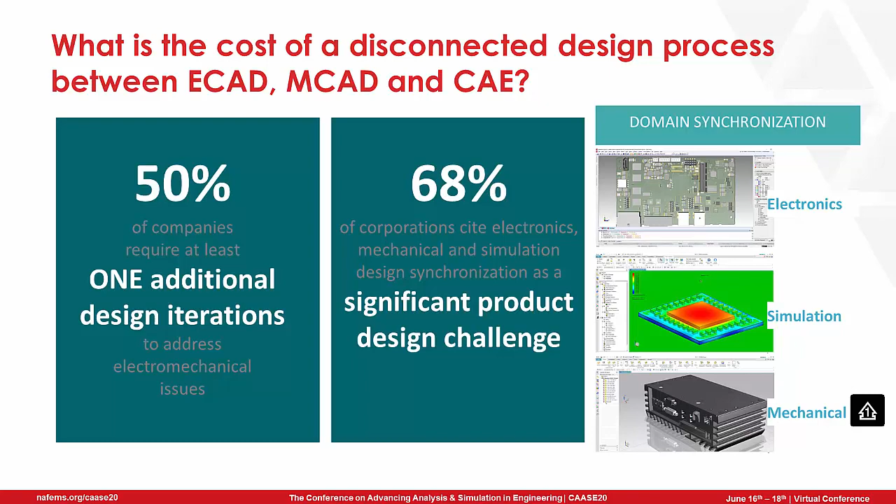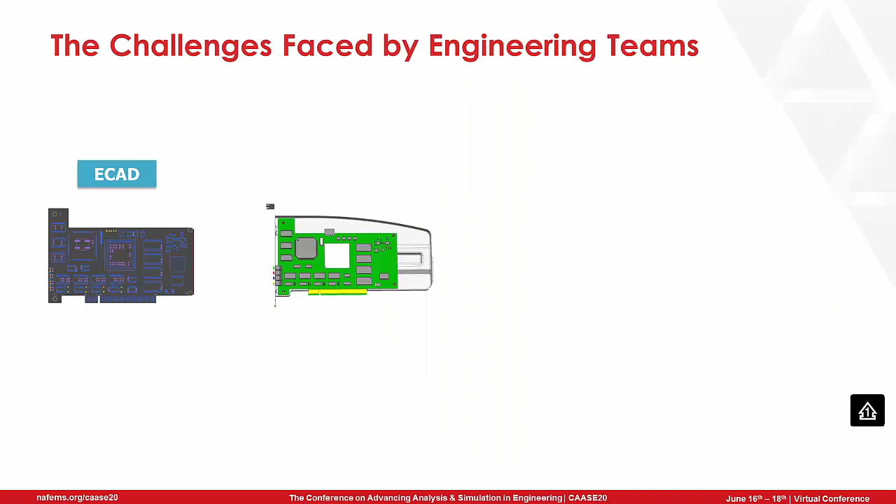So first, let's have a look at the challenges faced by the engineering teams. So on the left, you have the ECAD domain, where the schematic is designed and PCB layout is done. In the middle, you have the mechanical domain, which takes care of all the 3D information for the components, the board, the enclosure, making sure that all clearances are fine. And on the right, you have the simulation aspect. So here we listed a few possible options: electronics cooling, PCB thermal, vibration and acoustic.

What's interesting is that sometimes when you start, for example, with electronics cooling, then you may need to go into more detail. So going from a system level analysis to a board level analysis to then a component thermal analysis. Also, if we look, for example, at the solder creep pin's durability, you may require inputs from other simulation results. So for example, the electronic system cooling and the durability will be required. And once the multiphysics aspect is completed, you need to be able to send back this information to the mechanical designer, even to the electrical designer, if changes are required in order to optimize your design.

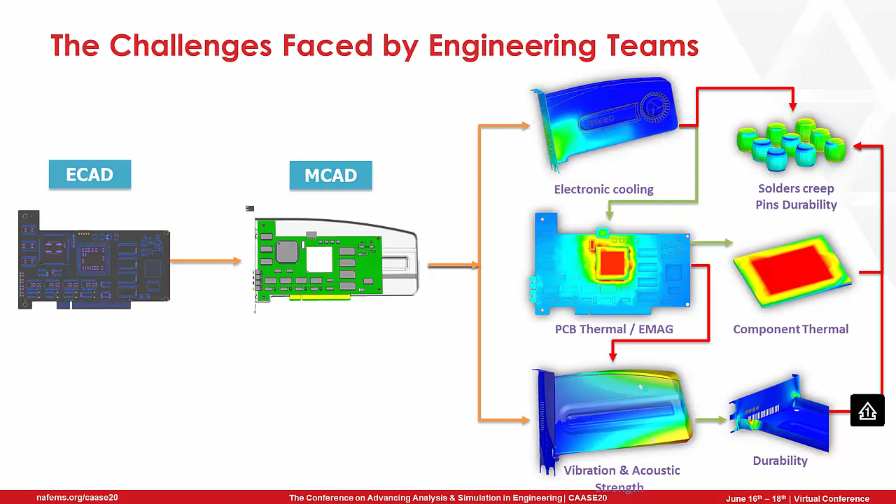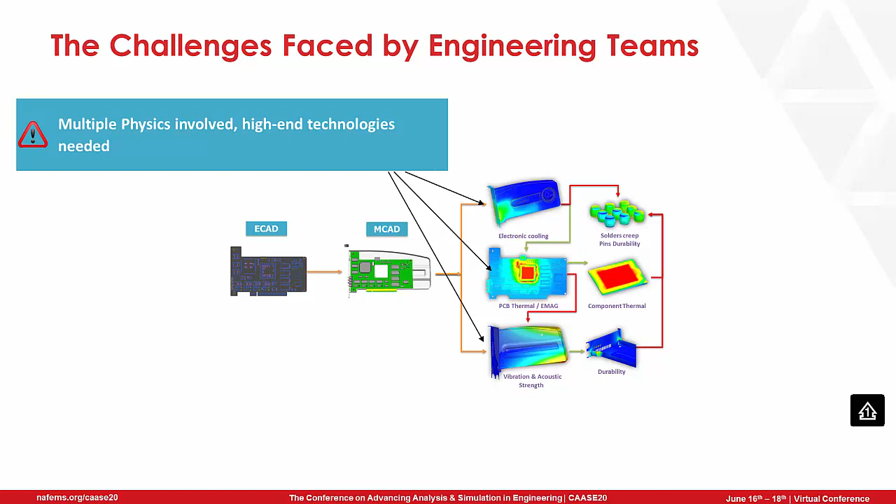So when looking at all these multiple arrows and this workflow, you realize that there are a few pain points. So first of all, multiple physics are involved, right? So you really require high-end technologies. Also, there's file transfer involved here between ECAD and MCAD, between MCAD and CAE, and also between the simulations. So very often those processes are taking too long and the data files to exchange or transfer are too large.

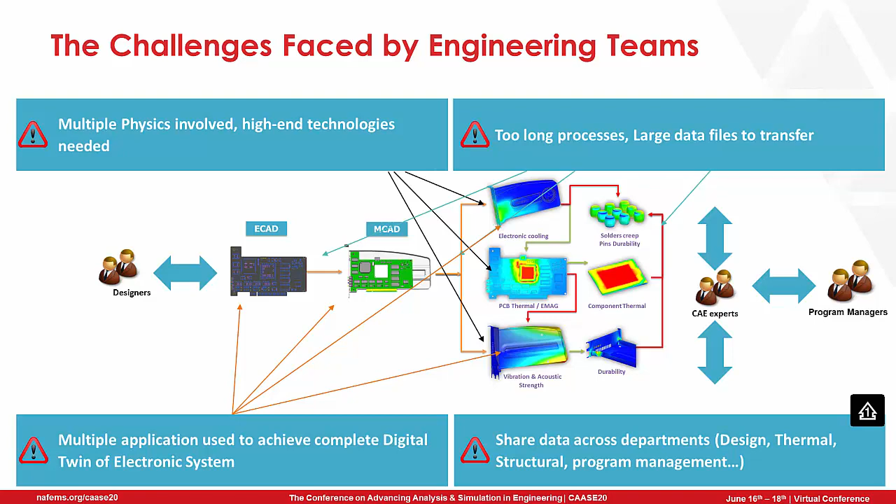As I mentioned previously, you might need multiple outputs to be used, so multiple applications may need to be used in order to achieve this digital twin and be able to optimize your electronics design. And the fourth one, well, multiple applications mean that multiple stakeholders may be involved in this process. So you may need these different expertise just to be able to use the tools, and also you might need to share this data across the different departments in an efficient manner. So let's start with the ECAD-MCAD integration section.

So to understand a little bit better which file format we should be using, I think it's important to have a quick review of what is a printed circuit board. So a PCB is a structure used to connect and support electronic components.

It's made of multiple laminates, which include mostly glass epoxy-based material, and then you have copper that's coated on both sides. So the in-plane connections for the components are done by etching away the copper to leave the different traces. And then after you can protect them with either plating if they're pads or with solder mask for the traces.

The through-plane connectivity is done by drilling holes either mechanically or by laser, and then by adding copper within the barrel. So you have the traces, external, internal, the copper planes. You have the stack-up details that you need to fully understand with the file format. So dielectric thickness, the signal layer thickness, the adhesives, and obviously the vias for the interconnections.

So are you just using through-hole vias? Are you using blind buried vias? So vias that don't go directly through the board? Micro vias, which would be smaller in this case. So all these aspects are very important.

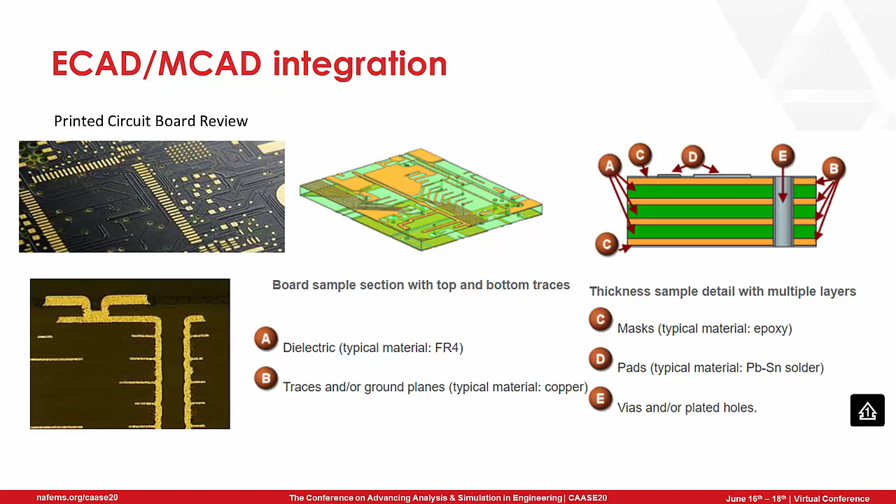So if we look at the different formats available out there, there's at least two of them that are very good. So the first one is ODB++. So if you're doing thermal analysis today, you might already be familiar with that format. So it's a format that allows you to capture all the details of the PCB from the component to the board, the stack-up details, the vias.

So this format contains everything since it's a manufacturing format. So it's used by the ECAD designer to send to the PCB manufacturer to fabricate the PCB. Now, the IDX format, which is a collaboration format, also contains the same information. But what's interesting is that you also have a workflow feature that is completely unique with regards to the other file formats.

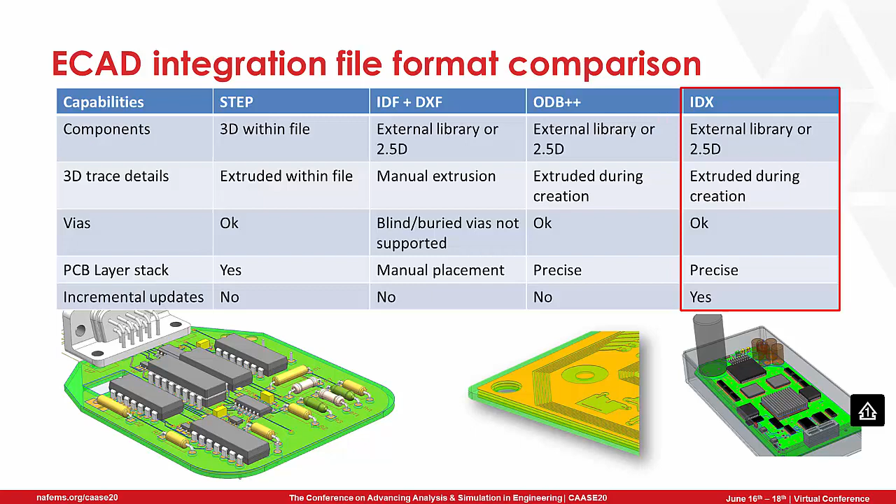So what is the IDX collaboration format? It's a workflow for incremental design exchange. So when you start the design collaboration, you initially send the full design, which we call the baseline. If it's coming from the mechanical side, you can put your initial board dimension, initial connector, LED placement, some mounting holes. But then after, the design will advance concurrently.

So any following changes will come from an incremental IDX file, for which the receiving end can either accept or reject the changes. So it's really like a discussion going on here where you understand the changes that are coming, so you have a robust transmission, you have a visualization of the results of the changes that are being done, and everyone can synchronize on the changes at the end.

Now, one thing that can become difficult sometimes is managing all those changes. So there's a lot of back and forth, accepting, rejecting changes. Sometimes the discussion and collaboration can take longer. And sometimes a rejection can be caused by something very simple that is just unknown to the initial designer or to one of the domains.

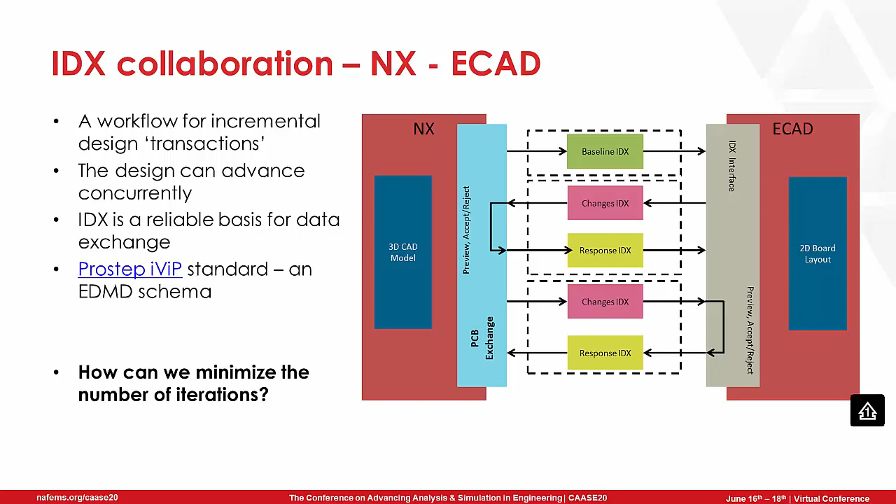So one of the questions when it comes to IDX collaboration like this is how can we minimize the number of iterations? And in the optimized workflow that we're presenting, there's one new feature that we developed in our tool, which is ECAD design rule checks inside the mechanical tool.

DRC rules is a concept that's already used on the electronic side, so you can check clearances between traces, holes, components. But on the mechanical side, most of the time what you have in your tool is a generic 3D clearance tool. And what we did on our side to optimize the workflow is to enable the 2D rules to come from the ECAD side. So we pre-process the data to allow orthogonal checks in the X and Y plane and not just the 3D clearance checks.

And what's very important when you use design rule checks in a mechanical tool is to support multiple PCB concepts to define those rules more easily. The body for the board substrate, the areas, the component board side, the ref des, package, part number, all those concepts need to be understood. And obviously the performance is very important. For example, for 3D clearance checks, 2000 components, double-sided board took around 10 seconds.

So if you take too long for doing those checks, then it might become easier to simply send an incremental change to the other domain and get their feedback. But if you can get quick response from DRC checks when you're doing what-if analysis, moving things around, it's very valuable. And then obviously you need to be able to differentiate between the PCB entities and the assembly components to conduct more advanced types of checking when it comes to the PCB, to the mechanical enclosures, for example.

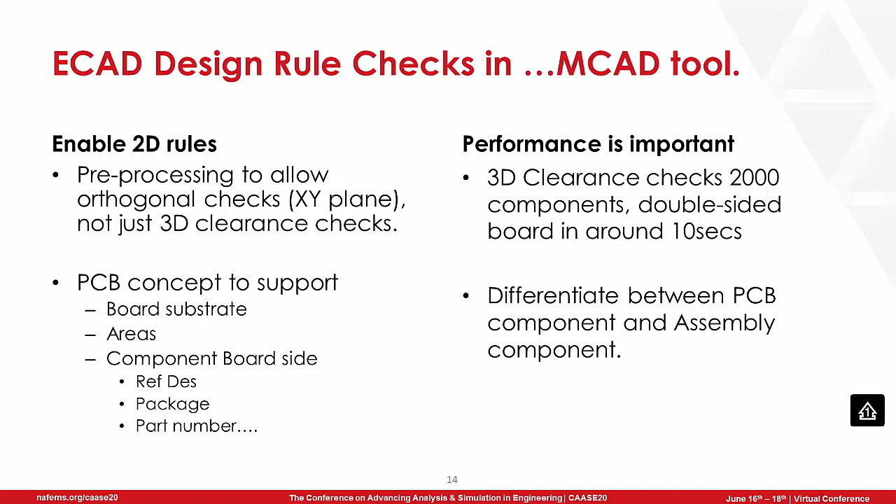So by combining the IDX collaboration workflow with the design rule check engine, we really get an optimized ECAD-MCAD collaboration process. At the top here, you can see that you can preview the changes, send the transactions between the two domains, and you get a synchronization of data, which is often difficult to guarantee with other formats. And again, you minimize the number of iterations.

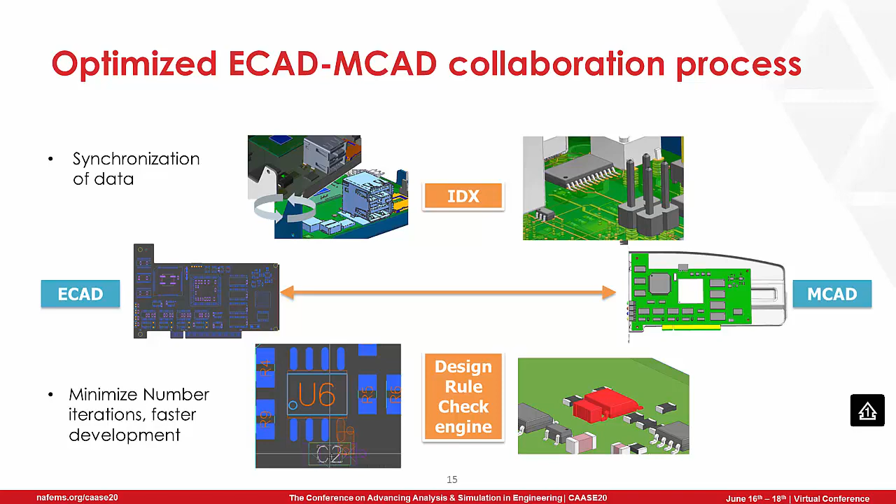You make those transactions more efficient with the design rule check engine because each domain can do initial validation to see if what they're proposing makes sense or not, if they violate any rules that would be from the other domain. So by combining the IDX and the DRC capability, you really make sure that the transactions you're doing are more meaningful. Now let's continue with the thermal simulation of PCBs.

We've mentioned it a little bit earlier in the presentation. The miniaturization aspect of electronics is very important in the different industries. And then you combine that with the increase of performance that is required, and it becomes more and more important to cool the electronics correctly because the heat can have effects on the circuit operation as well as on the PCB integrity. So for example, on the thermal effects for the circuit operation, the gain, threshold voltage, leakage, and other electrical parameters can vary with temperature. For example, a 10 degrees Celsius temperature increase can double the current leakage in active devices.

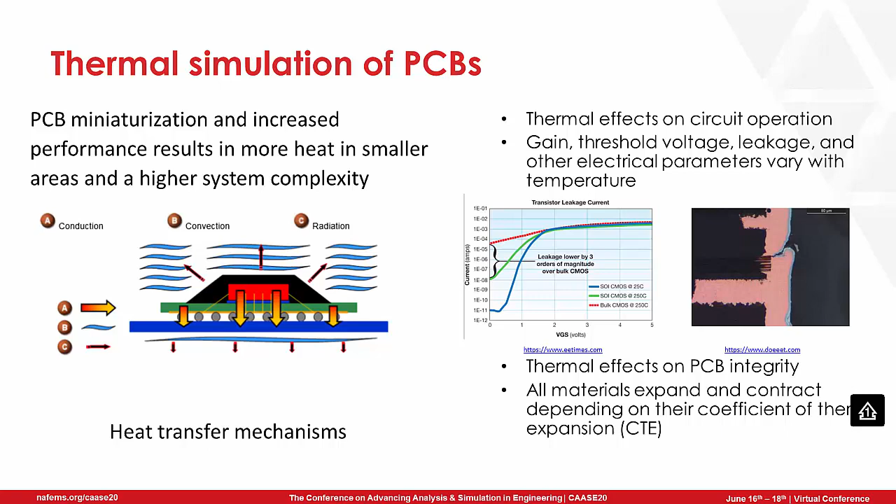And obviously the PCB integrity is also very important. All materials expand and contract depending on their coefficient of thermal expansion, in other words the CTE. So the temperature increase may lead to component failure, or as we can see in this picture, a via cracking within the PCB, which can be very difficult actually to catch when you're testing your board. A good CAD-CAE integration here is required for proper electronics cooling.

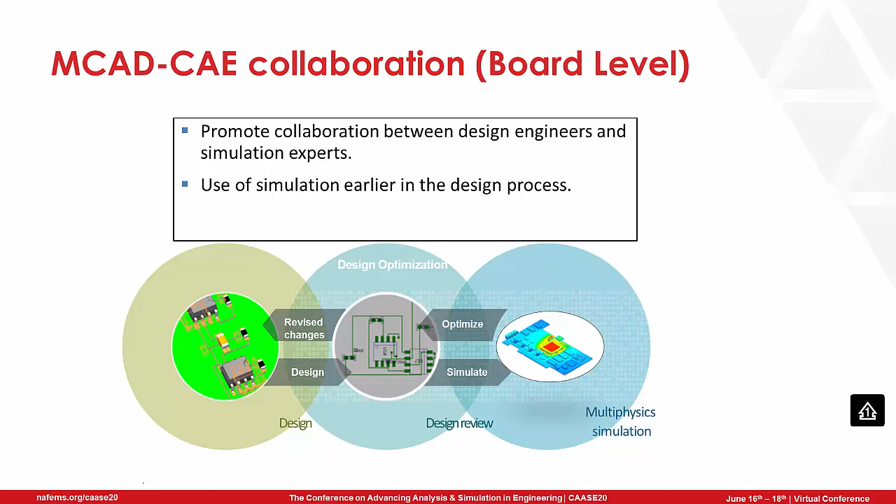So we're going to look at two aspects of the MCAD-CAE collaboration. First, how can we promote the collaboration between the designers and the simulation experts? And then, how can we use the simulation capability earlier in the design process, so not just at the end when the PCB is fully completed? So the first thing that comes to mind is, can we do the simulation in the same environment as we do the mechanical design? And the answer is yes.

So certain tools like Simcenter 3D allow for a single unified environment where you can do the mechanical design, the meshing, create the boundary conditions, and do the post-processing. And since you're in a single environment, first of all, there's no file transfer. And it really facilitates the design exploration and the optimization that you can do because there's no file transfer.

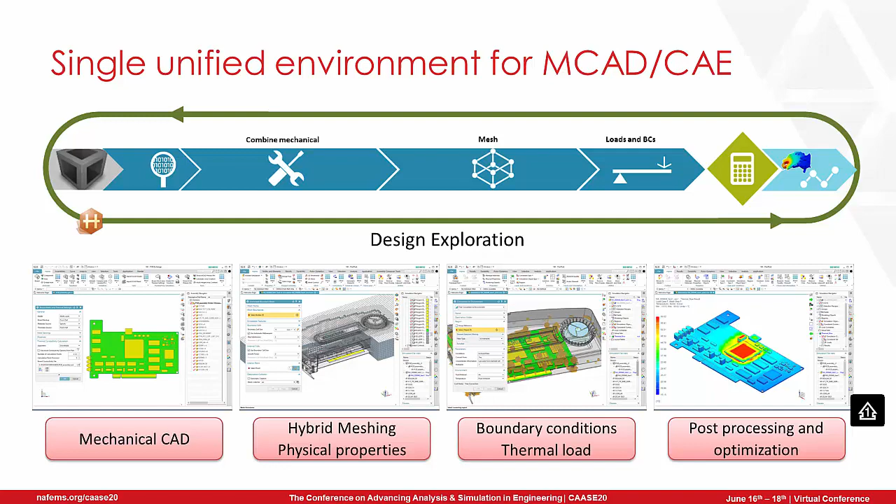Now, how can we optimize and make this loop as efficient as possible? Well, first of all, similar to ECAD-MCAD integration, there's the performance and the efficiency of this process. So that's why in our solution we use a 2D multi-layer shell approach. If you start meshing your PCB with 3D elements, with all the details of the copper traces, this can be a very manual and time-consuming process. So the 2D multi-layer shell approach allows you to automate the simulation preparation from CAD.

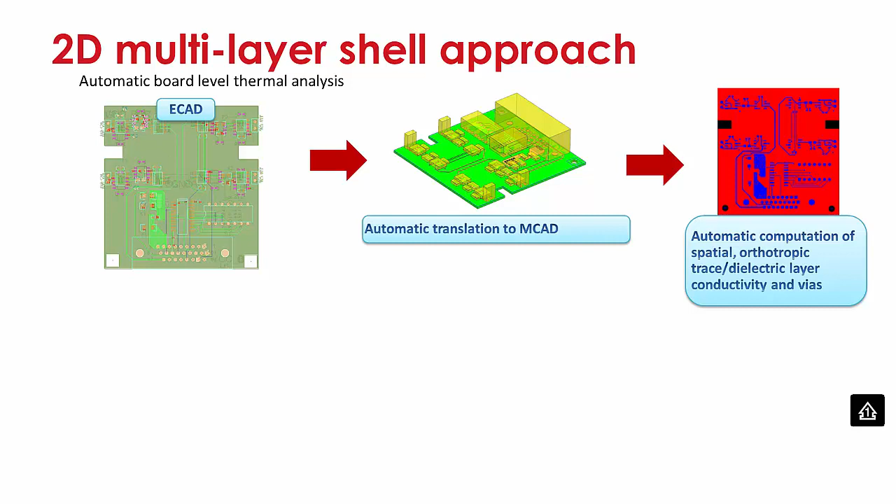For the components, we can automatically generate lumped representations of all the components with different JEDEC models, one resistor, two resistors, based on the level of detail you're looking for. And then you automatically create this thermal flow model by meshing the boards, meshing the components, creating the simulation objects and all the boundary conditions that are required for your simulation.

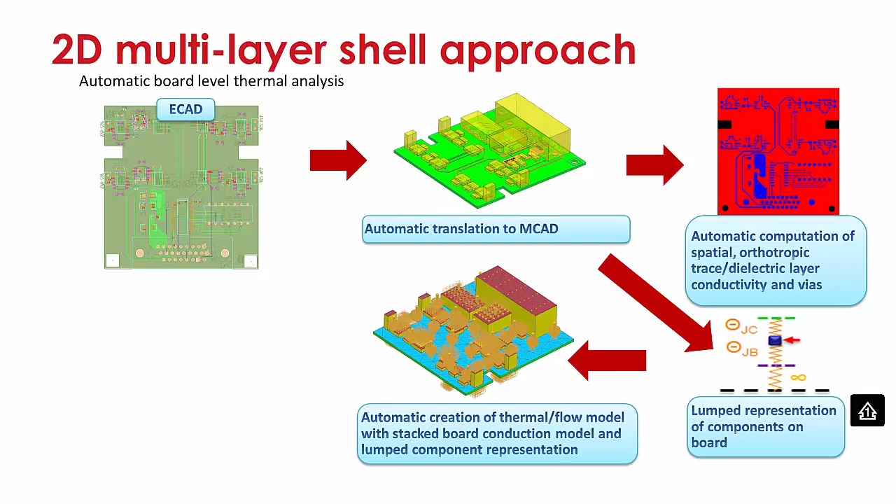In my presentation last year at the NAFEMS World Congress, we compared this approach with the 3D detailed approach, and the conclusion was that we could get the same level of precision within 1 degree Celsius if your parameters are set correctly. The advantages of this approach, of the multi-layer shell approach, are multiple, but I would really like to bring your attention to two.

First of all, the performance. By this approach, it can take minutes instead of hours when compared to the detailed 3D meshing approach, based on the level of complexity to generate this model. So you're not wasting time doing manual work, and since you have a performant process, now you can promote the simulation during the design process. So since it only takes you a few minutes to generate your simulation models, you can run it more often earlier in the design process.

So for example, at the component placement, with maybe just an average of the copper distribution per layer, at the pre-routing when you're starting to get some copper content, and then at the end for the full routing, and more often based on the different design iterations. So the performance and simplicity of this approach combined with the precision allows you to really promote the simulation process earlier and benefit the designers with your results.

The big second advantage is the CAD associativity. As I mentioned before, we're in a single unified environment in this case. So what that means is that the FEM and the CAD and the simulation objects are associated together. So if we move one of the components in the mechanical domain, the FEM and your objects on the simulation side will also move.

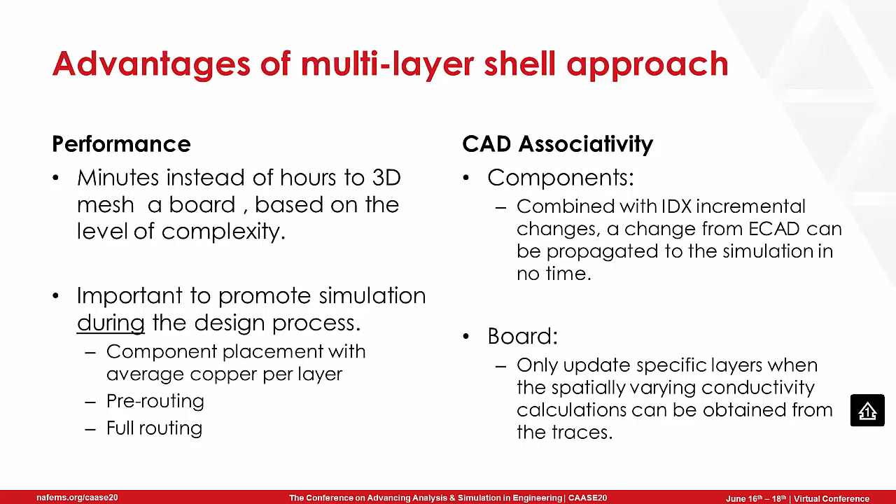Looking back at our optimized ECAD-MCAD process, to which we added the CAE aspect for thermal analysis, here's how the optimization looks at this point. We still have ECAD on the left, MCAD in the middle, but now it's actually CAE as well with our unified environment. So the file transfer is still IDX. We still have the design rule checks to optimize the electronic to mechanical collaboration. But then we have between MCAD and CAE no file transfer, so full synchronization of data from MCAD.

And then what's very interesting is that as you get your simulation results and you'd like to optimize the temperature distribution, you can reuse the design rule check engine to validate your different what-if scenarios. So if I move this IC to a certain place, if I move this component there, if I change the board or the mounting hole locations, I can make sure that I don't violate any rules that would be on the ECAD side. So still really optimizing the ECAD, MCAD, CAE collaboration in this case.

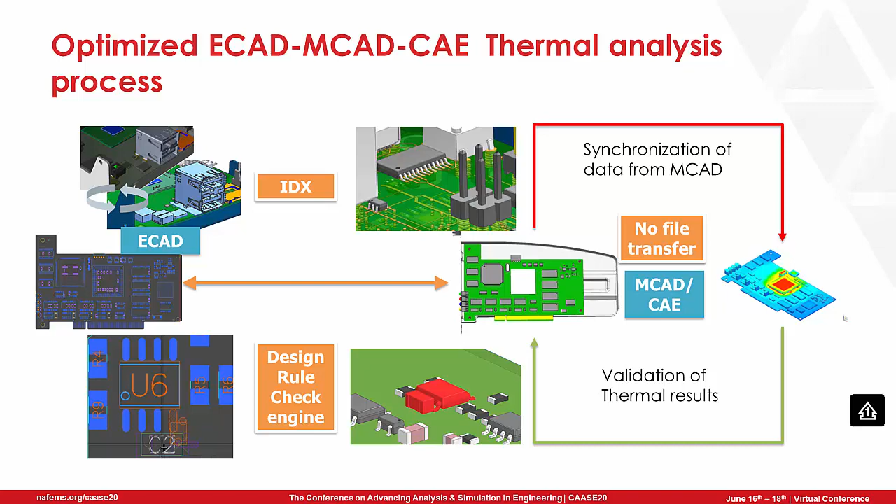So now let's go to our last topic, the structural analysis. And in this case, since we're discussing miniaturization of electronics, we'll discuss high density packaging, which is required to address those small form factors. So the ball grid array packages enable closer placement of pins for ICs with hundreds of pins, right? But the difficulty with those packages is that they require an advanced surface mount process.

So first of all, the reflow profile needs to be optimized. And establishing a reflow profile is not easy. You need to make sure that the minimum reflow temperature is reached to reflow the larger components, and at the same time, the temperature does not exceed the threshold temperature that might damage the smaller heat-sensitive components. So the optimal profile must take into account the solder paste, the flux used, the size of the board, the density of the components on the board, and the mix between large and smaller, lighter components, right? So this is very difficult and time-consuming to find.

So you're gonna have to use thermocouples at multiple locations on the board and do multiple trials to get your profile right. And that's just for the reflow. If everything goes well, you're good, but the inspection is difficult. You're gonna need an X-ray machine or something like this. It cannot be manual inspection with this high number of connections. Ideally, you have in-circuit testing that's very precise and developed that can help you with this. And as we can see from the picture here, the rework is almost impossible. Most likely, you're going to have to throw out the component and add a new one.

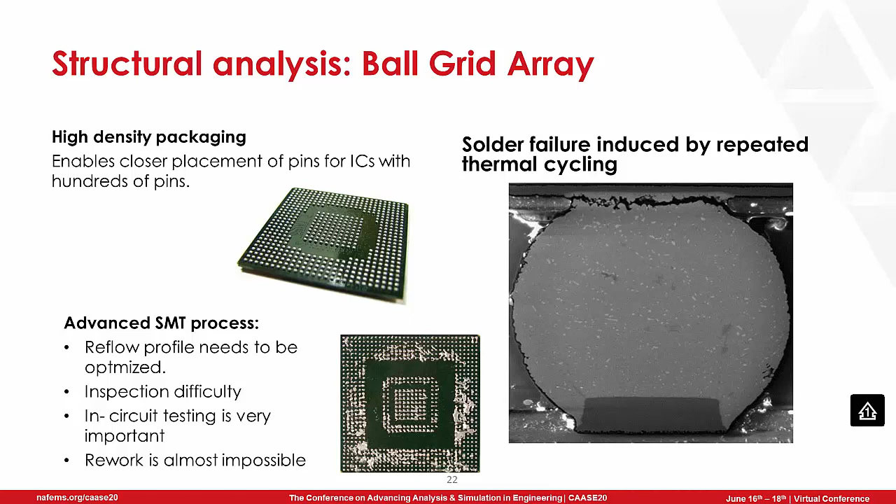So it's very important whether you are at the assembly stage with the different processes for the fabrication and assembly of your board, or whether you're in the field, solder failure can be induced by repeated thermal cycling for these components.

So when it comes to PCB design, there can be multiple sources of component models. You have the symbols for the schematic, you have the 2D footprints that are used on the electronic side, you have the 3D models, you have the thermal component models, so it could be compact thermal models, it could be the JEDEC resistor models. You also have structural component models that you need to use.

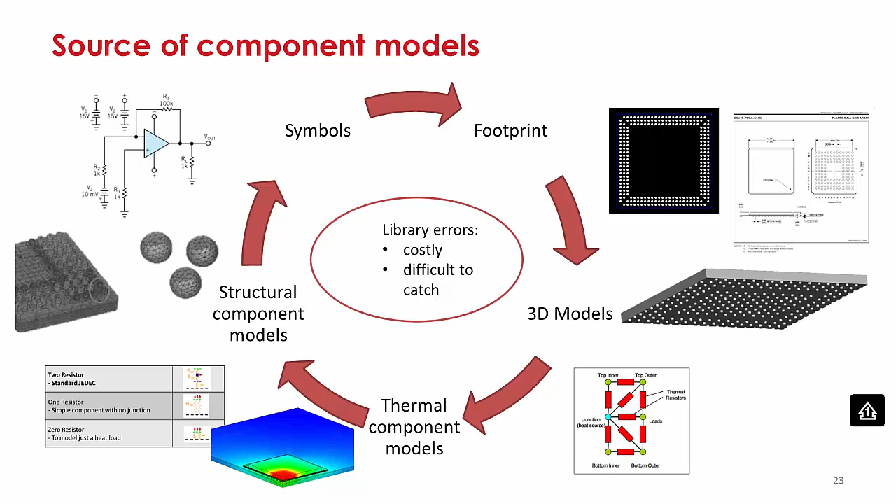And before going there, it's important to have an accurate representation of the 3D models. And when it comes to ECAD and MCAD collaboration, sometimes ECAD can have different 3D models than MCAD. So 3D model exchange between ECAD and MCAD. Why is this important? So first of all, you need consistent and accurate ECAD and MCAD libraries for your design. You need to have the same geometries, you need to have the same orientation of the 3D model with regards to the footprint. And this needs to be synchronized for all your library.

Now, generally, approximately 10% of the total PCB design effort is spent on library, and library errors are costly and difficult to catch. In this case, we decided to develop a tool that can exchange 3D models between your electronic library and your mechanical library. So this way, when you come to the simulation side and you need to have an accurate representation of your 3D model, you can be sure that the 3D model is actually the same one that's used between all the different domains.

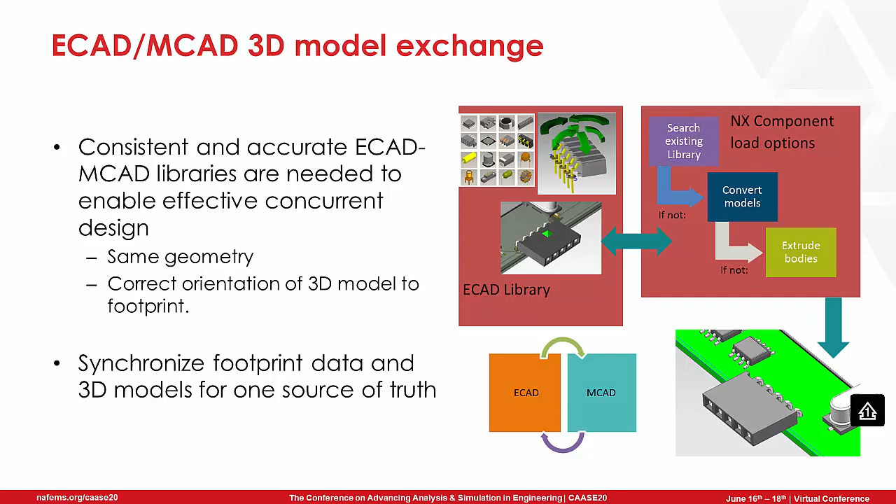Just like on the thermal simulation side, another very important aspect to optimize your workflow is the associativity of the FEM to the CAD part. When you create your different mesh for the die, for the package, the mold, the substrate, the ball grid array, you can associate the FEM to the part file, and when the configuration of your CAD changes, so again, going from an IDX file, coming from another change from the mechanical designer, you can update your FEM and your simulation environment to reflect those changes.

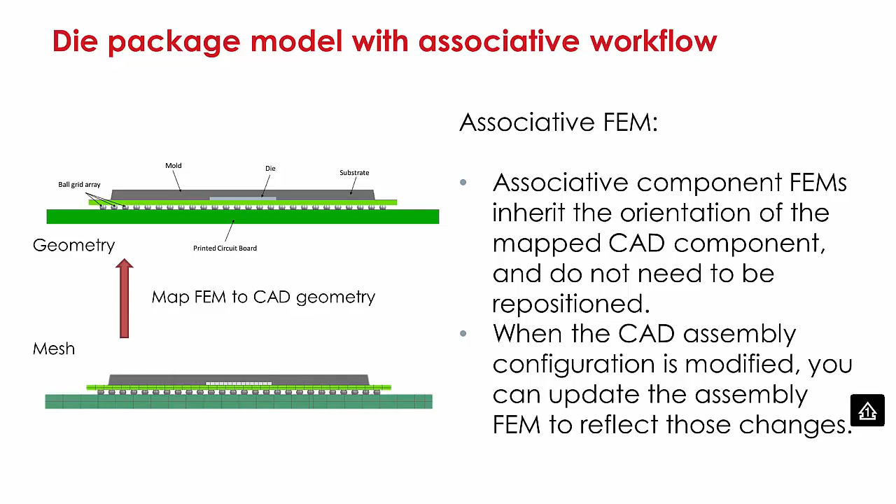Our optimized ECAD MCAD CAE analysis for the structural is getting very robust. We still have the IDX and the design rule check engine. We now added the 3D model exchange to make sure that the representation we use for structural analysis is accurate and the same between the different domains. The synchronization data from MCAD works. The CAD associativity to the mesh is kept, whether you're doing the thermal or the structural analysis.

And also, from the structural side, same thing. You can validate and simulate your changes if you see that there's too much deformation where you place the IC on the board. You can make sure that the new location where you want to place it doesn't violate any design rules coming from ECAD.